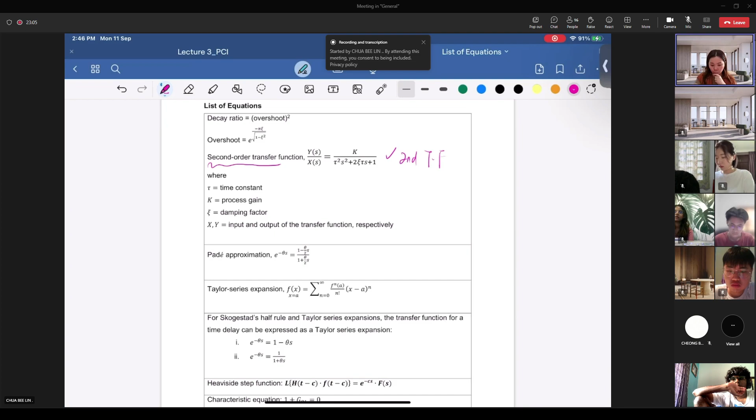So this is the equation. This k is a combination of k1 multiplied with k2. So this is second order. So you can see from here, the first order actually is not given. So the first order transfer function standard equation is not given.

So you have to memorize this, which is a simple one: k over tau s plus 1. So the second order default equation, standard equation for the second order transfer function, is given. So from here, you will be having the second order transfer function formula provided to you.

And this is the damping factor. So something like this, or you prefer to write it like this, it's fine. For the damping factor, you follow the symbol that looks like a curve, ding ding ding like this. So as long as there's a curve, then it is the damping factor symbol. It's up to you how you write it.

Similar to this. So the tau is the time constant that we learned last week. So this is tau. If you have a smaller tau, it means the process is faster. So when tau is smaller, it means it is a faster process.

When tau is bigger, it means the process is sluggish, meaning that when you apply a change to the system, it will take a longer time to achieve the steady state. Then we say tau is bigger.

Then we have the damping factor. This damping factor we will discuss is like a new performance index to check how the process responds to a change. We have some maths involved as well in this lecture 3, and I've included some additional topics. Actually, you have this Heaviside learned in your Maths 2.

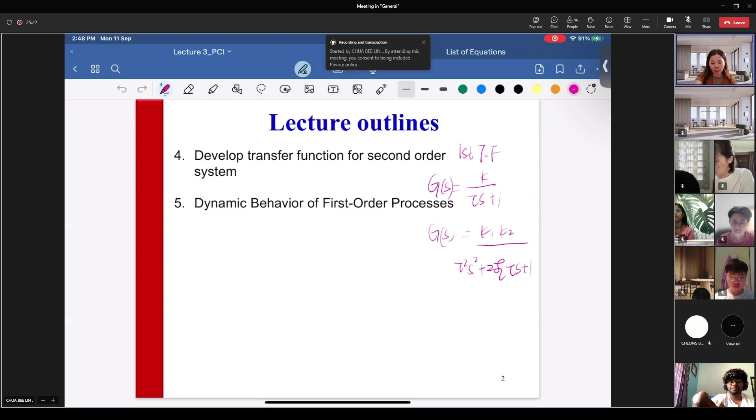So we go back to the outline for today. We will study when you derive the first order, what happens - is it a fast process? You are going to get the response and sketch the graph, for example, to know the dynamic change, or dynamic behavior. Dynamic behavior is your function of the output versus time, the change of your output over time.

We are going to learn the dynamic behavior of the first order, and then next week we are going to learn the dynamic behavior of the second order. But we will derive the second order transfer function first. So this is the lecture outline.

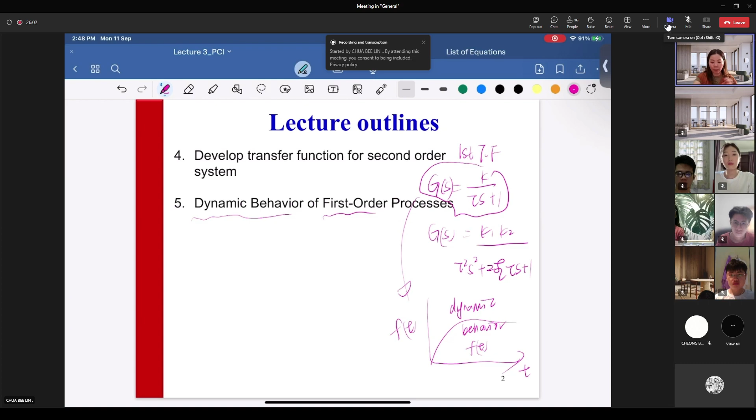Second order dynamic system - for example, how can you get the second order transfer function? For example, with 2 tanks in series.

Like this example, you have 2 tanks in series. Series means side by side. So if the outlet flow rate from each tank is linearly related to the height of the liquid in that tank...

...transfer function - they ask you to derive the transfer function of Q2 over Qi, which is the output of this process with 2 tanks, over the input of this process. So we call this the transfer function of the output over the input, Q2 over Qi, meaning the final output over the inlet, which is Qi.

So you will get Q2 over Qi. Why is it in uppercase? It is because you already Laplace transformed both sides, changing them into the s response. Then you will get the small letter q2.

When you Laplace transform this, like for example like this, you'll be having Q2(s), the Laplace transform. After you perform the Laplace transform, you will get this - meaning this is after Laplace transforming both sides.

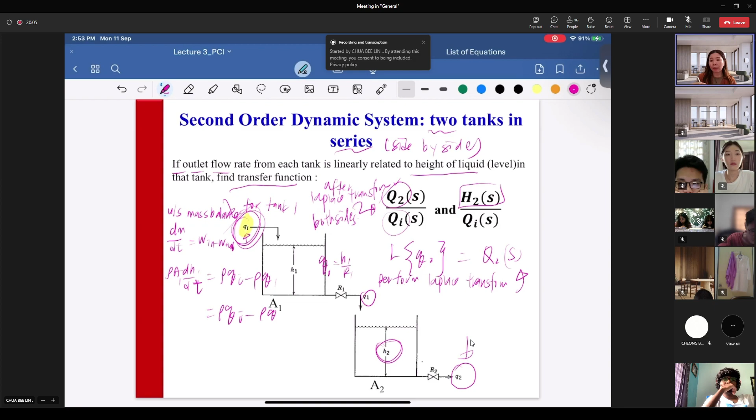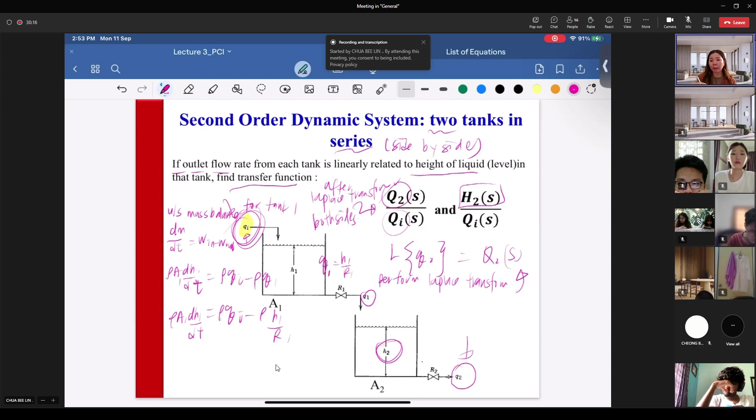So rho H1 over R1, rho A1 dH1 over dt. Then you can cancel the density.

Okay, this will become your first equation of unsteady state mass balance. Then you change this one to steady state mass balance. You'll be having A1 dH1s over dt equals to Qis minus H1s over R1. Then you'll be having equation 2. We actually repeat the same thing like we studied last week. So from here, you'll be having equation 1 minus equation 2.

Okay, so I will go through the example with you. This one is actually starting from dm over dt equals to rho qi minus rho q1. Then straight away they expand this, you put here tank 1 is A1, tank 2 is A2. The cross-sectional area is given, meaning the size of tank 1 and the size of tank 2 are different. That's why you have the A1 and A2.

Okay, so it is the same derivation like the tank level. We have already learned this rho A1 dH1 over dt last week, where we expand rho equals to m per v, m equals to rho multiplied with the volume, and density multiplied with area multiplied with the level. Then for tank 1, we'll be having rho A1 dH1 over dt for the accumulation term. Okay, then they cancel the density. Okay, you will get this equation. So you need to go through again this one, derive again.

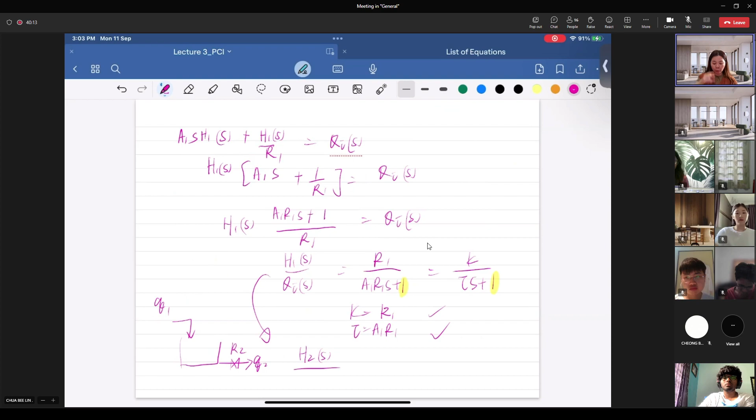Then you repeat the same for tank 2. You will get exactly the same one, like H2S over the inlet for the tank is Q1. So this one will give you Q2 equivalent to H2 over R2, linear relationship. So you don't need to derive again because they follow the same equation, just tank 1 and tank 2 having different inlet. For tank 2, the one going in is Q1, and here is R2 and here is Q2. So follow exactly the same. Your input is Q1, so this will be your input. Your output is H2. Then equivalent to R2 over A2 R2S plus 1.

If you derive the first one for tank 2, you don't need to repeat. You just apply the same, change accordingly. For tank 2, the inlet is Q1, so we change to Q1. And the resistance to flow is R2, level is H2, cross-sectional area is A2. Then you already get your equation number 2.

So just now we have derived, I put it here, you have tank 1 equals to Q, where's the exit flow rate of tank 1? Exit flow rate of tank 1 is Q1. So your Q1 is H1 over R1, and you have derived Q1S equals to H1S over R1. So this is for tank 1, valve 1. For tank 2, valve 2, you will get exactly the same derivation, but this exit flow rate is Q2S equivalent to H2S over R2. So you have this equation.

So altogether you already have 4 equations, the ones I highlight here: 1, 2, 3, and 4. You are going to use what they call this rule, either it is product rule or chain rule that you have learned, so that you can finally derive the equation for the one they ask.

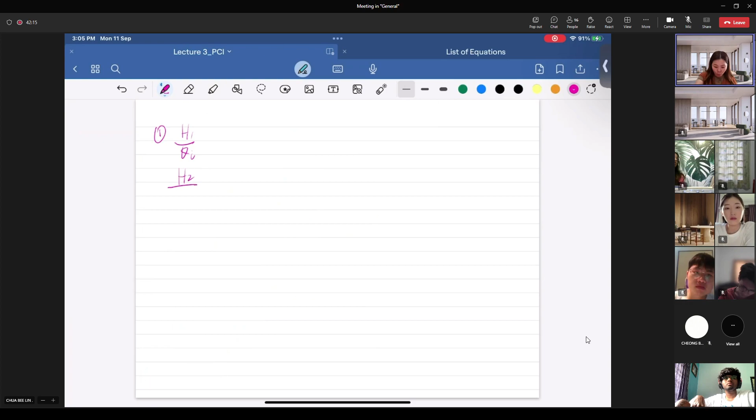For example, they ask for these two, 1 and 2. So you copy all the equations again that you have derived. We summarize the equations: number 1, you have derived H1 over Qi. You have derived H2 over Q1 as well. You have derived Q1 over H1. For example, your valve, right?

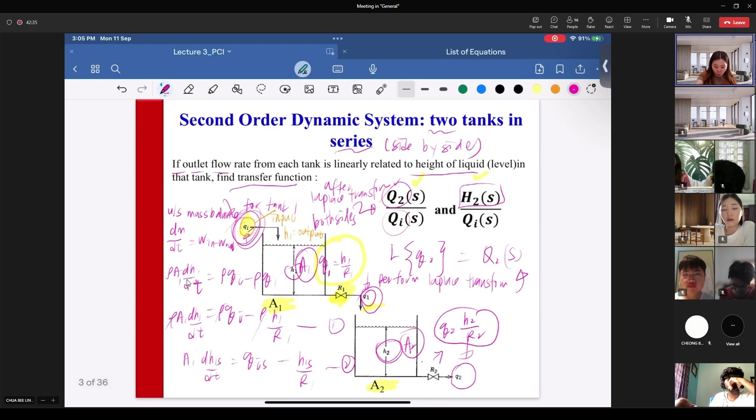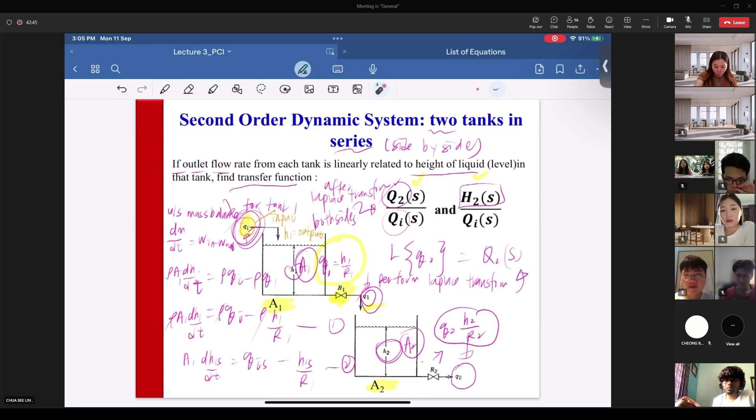You have Q1, so valve number 1 - if you look at the figure over here, this is valve number 1. Where's my pen? Okay, I use this. So this is valve number 1. You have derived the equation to be Q1 equals to H1 over R1. So you will be having the equation of Q1 over H1, and also you'll be having these 4 equations.

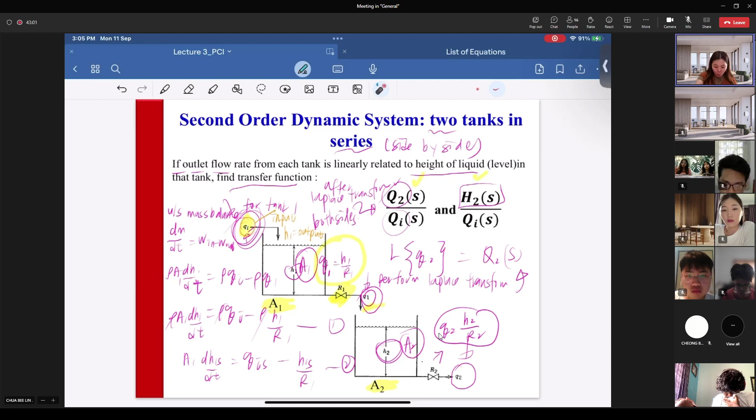You rearrange, you copy the 4 equations you have derived. Then you'll be having also Q2 over H2. So these are the 4 equations I have.

Okay, for the valve, H2 over Q2, or Q2 over H2. This one is just maths. Why do you need to rearrange the position? Because later you have to know we are using the product rule or chain rule, something like that. You have learned this in maths already. For example, okay, see,

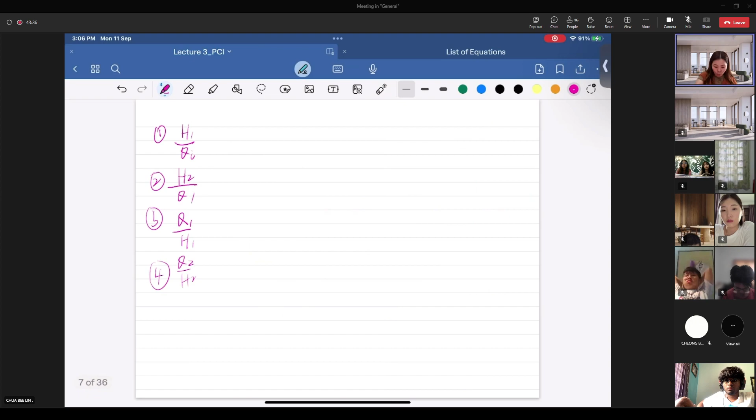they ask you to derive this Q2 over Qi. You have to utilize all these four to finally get this. So what we do is we will focus on the one on the top. You'll be having this, correct? So you will be having Q2 over H2 multiplied with this one on the top.

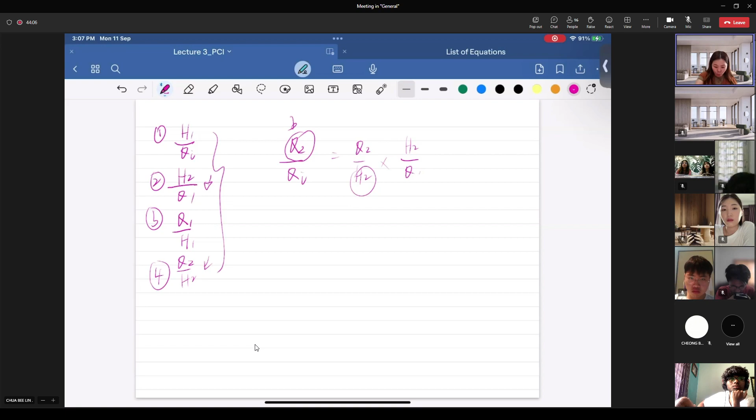So you will find something, what is H2. Your H2 is only this, so H2 over Q1. Then you'll be having this one on the top, Q1 over H1. And finally, H1 over the Qi. Okay, so that you can cancel, and finally get this one over this one.

This is you have learned in maths, I don't know which maths. So when you have this Q2 over the Qi, then you will start from top, Q2. You find which one relates to Q2, like for example we derive the equation, the one I highlight in yellow, right? So you have to find what is the Q2 equation involving Q2. Only this one. So when I only have this equation, like the one I put in yellow color, 1, 2,

you cannot see what point. So this one, 1, 2, 3, 4, right? You have to find something that has Q2. So only this equation has Q2, man. But you have to rearrange so that the Q2 will be on the top. So you'll be having Q2 over H2, right? You cannot rearrange Q2 multiply with R2, ma. Therefore, you will only get this one, ma.

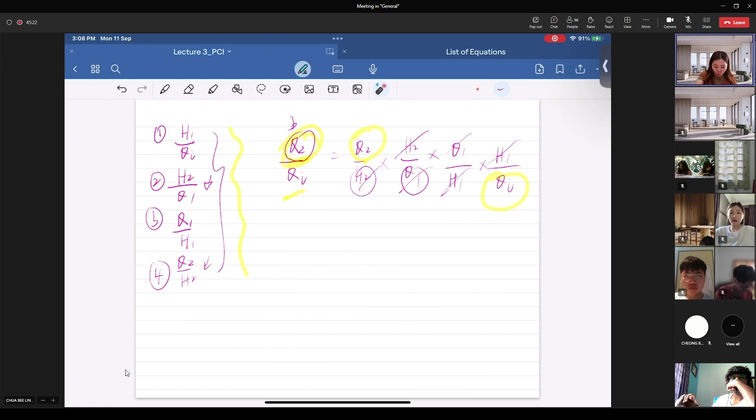Q2 over H2, you have derived first, then you link to the chain rule to actually finally derive the Q2 over Qi. So how do we start? We will start with the one on the top, okay? This one you can memorize also, fine. You use your maths. This is the question: they ask you to derive Q2 over Qi. So you start with Q2 and put the Q2 on the top.

Then I will go to this slide. Okay, I have this Q2. My Q2 must be on the top, means I must rearrange the equation to become Q2 over H2. Must be a transfer function, ma. So Q2 over H2 equals to 1 over R2. Then I will put it here, my equation. Then my H2 is at the bottom already, ma. So I must multiply with H2 on the top so that I can cancel out later.

So H2, you go to find which one has H2 in the equation. So H2 over Q1, that's this one. Okay, then you find Q1 must be on the top. Then this one, Q1 over H1. Then you can cancel the Q1. Then H1 must be on the top again. Finally, it's H1 over Qi. So something like that, you can cancel to finally get Q2 over Qi.

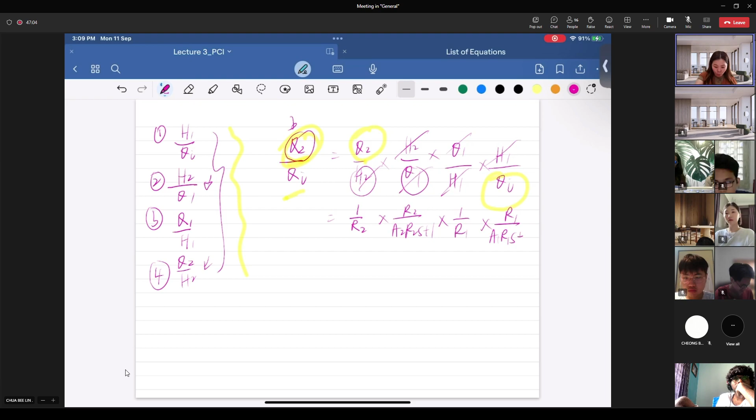Product rule or chain rule, something like that. Then you put all the equations there. You have derived this. The equation for the first one is 1 over R2 multiplied with R2 over A2 R2S plus 1, multiplied with 1 over R1 multiplied with R1 over A1 R1S plus 1. Okay, so you cancel. Finally, we'll get 1 over A.

We'll put all the information for tank 1 first and then tank 2. That's why this one will be placed at the front. So A1 R1S plus 1, then A2 R2S plus 1. Okay, so this is exactly like the pattern of K1 tau S plus 1 multiplied with K2 tau S plus 1. So 1, 2 to get this.

Like your tau 1 is A1 R1, then your tau 2 is A2 R2. Your K1 is 1, your K2 also 1. You split into 2, okay, so this one will be your second order. So when you have this, it is like the maths. You have tau 1 S plus 1 multiplied with tau 2 S plus 1. When you do the expansion, you'll be having tau 1 tau 2 S squared plus 2 damping factor tau S.

So this one is actually, before you compare with the standard equation, you'll be having tau 1 plus tau 2. You do the expansion, S plus 1. So this is the one we highlight, this one. When you do the expansion, but I do not use the A1, R1, I represent tau 1, tau 2. So tau 1 is A1, R1, tau 2 is A2, R2.

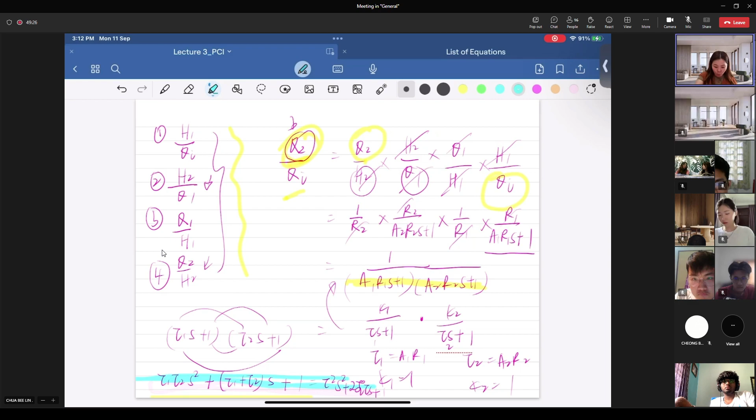So from here, this equation, you will compare with the default equation, which is tau square S square plus 2 damping factor tau S plus 1. So this is the standard equation for second order. Okay, cannot see this one. Okay, so from here, you have derived the second order transfer function for this one. Okay, so the answer, they derived for you already at this slide. Okay, so finally, you'll be having your tau 1 is A1, R1, and then your tau 2 is A2, R2.

Okay, then you can derive your equation H2 over Q1, and then they want the Q2 over H2 as well. So from here, what else do they want you to derive?

So you can play around with the chain rule and derive the rest. Okay, so then we go to the next example.

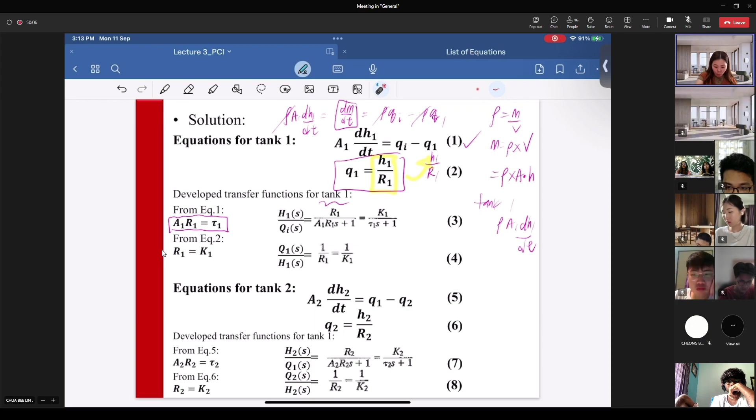So if you want to derive the transfer function to represent the first block, it will be H1(S) over Qi equivalent to K1 over tau1*S plus 1. Let's say this is the second example. And for this block, it will be Q1 over H1 equivalent to the transfer function 1 over K1.

And for this block, H2 over Q1(S) is equivalent to K2 over tau2*S plus 1. And the last one, Q2 over H2 is equivalent to 1 over K2, for example.

So from this case, if you want to have Q2 over the Qi, it is just a multiplication of the first transfer function, multiplied with the second, multiplied with the third, multiplied with the fourth to get the answer. So it will be H1 over Qi, multiplied with Q1 over H1, multiplied with H2 over Q1, multiplied with Q2 over H2, to finally get the answer of output Q2 over Qi. So this is how we get the transfer function of the final output over the initial input Qi.

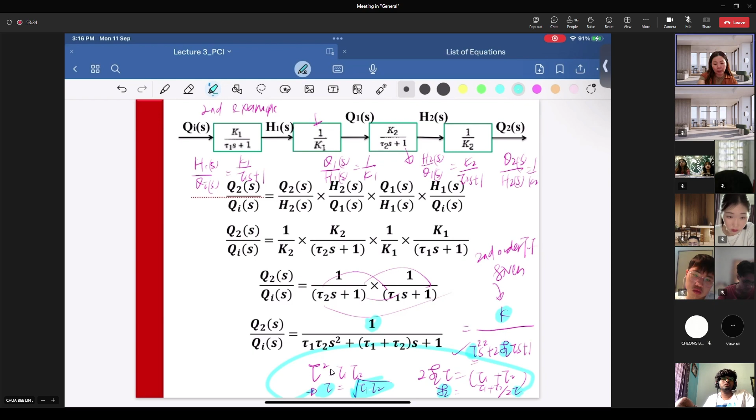So your K by comparison is 1. Then your tau you can get from the square root of this. And then your damping factor you can get from here. So by comparing the derived transfer function of the second order to its default equation, you solve three things: K, tau, and also damping factor. So this is when we talk about the second order transfer function, you have to calculate the K, the tau, and also the damping factor.

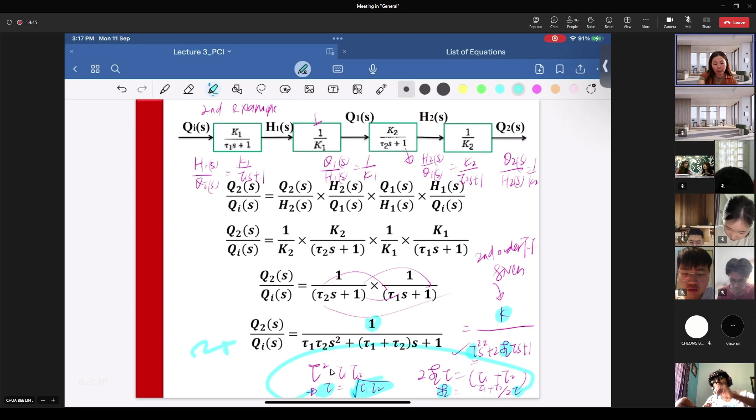For example, you do the expansion already, so you can compare just like this slide. You compare with its standard equation, this one. Then you're able to solve all this. The solution is given as well in this slide. Okay, so just now...

This one you already solved tau, where you solve your tau based on here. So you just substitute in. This is your tau. It's the same solution like I have presented just now.

Okay, so this is the introduction, how we derive the second order transfer function. So how can you get the second order transfer function? It's when you have 2 tanks. If you only have 1 tank, then you will get the first order. If you have 2 tanks, then you will get second order. Okay, so next.

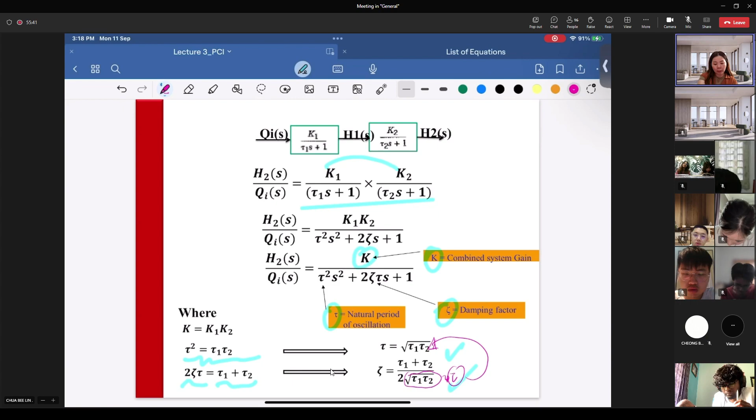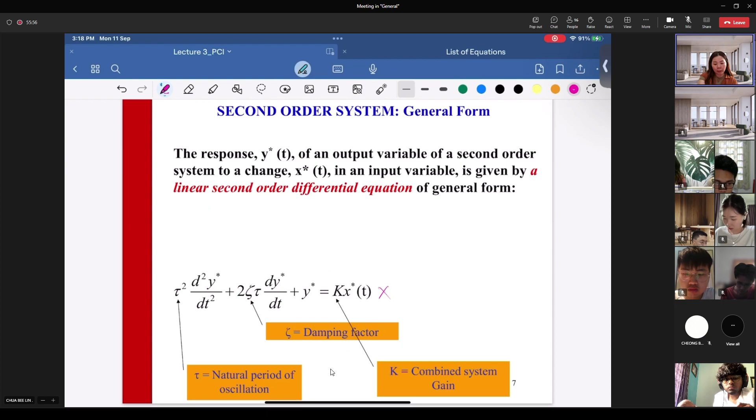So for the second order system, we already have the standard equation given, so this one you don't need to memorize. For second order, you just need to memorize the S response: K over tau square S square plus 2 times the damping factor times tau S plus 1.

The T response, you don't need to memorize. Just like the first order, the T response or the ODE equation, we don't need to memorize. You just need to memorize the transfer function for the first order and the transfer function for the second order, which is given in the list of equations.

They just explain to you: this is tau, this is the damping factor, Y is your output, and X is your input, exactly the same as the first order ODE equation. So this is the T response.

What you need to know is just the transfer function for the second order. This one you need to apply, and it is given in the list of equations. The one you need to memorize is only the first order transfer function, which is K over tau S plus 1.

So for the second order system, you don't need to know this T response. We already covered this S response.

So now you have transfer function block number 1, let's say represented as G1. The second transfer function is G2. If you want to get Y2 over U1, which is output over input, it will be a multiplication of these two blocks, meaning G1 multiplied with G2.

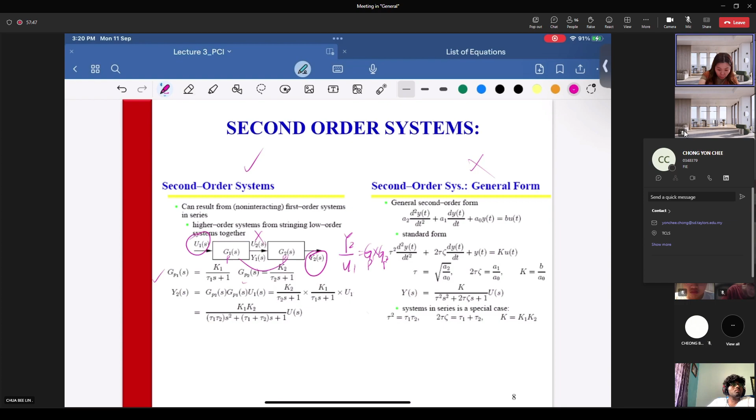Then if G1 is given and G2 is given, let's call them GP1 and GP2. Your GP1 is K1 over tau1 S plus 1, and your GP2 is K2 over tau2 S plus 1.

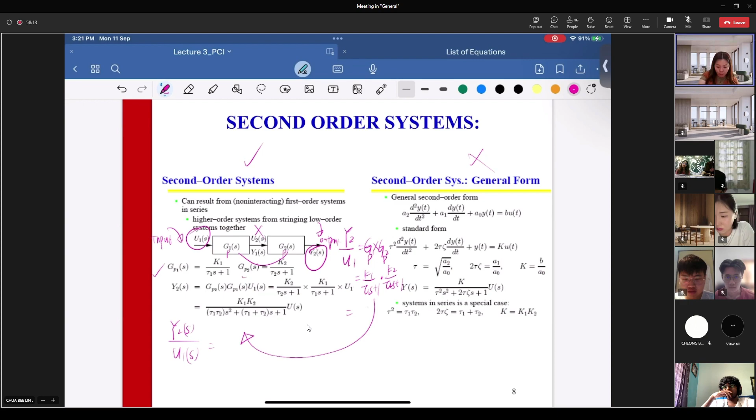Then you do the expansion, and you will get this equation and compare. You rearrange to get the output, which is this, and the input, which is U1 S. Do the expansion and you will get exactly this equation.

Move this U... 1 is missing here, so move that to the left hand side to get this. Then you will get K1 K2 over tau1 tau2 S square plus—this one is wrong a bit—tau1 plus tau2 S plus 1, compared with your K over tau square S square plus 2 times the damping factor times tau S plus 1.

And finally you will solve the answer to get tau. This equals this, equals this, and this equals this by comparison, so this will be the answer.

So you compare this one with this: this whole thing equals 2 times the damping factor times tau, and your K1 K2 is like your K. Then you will get this answer.

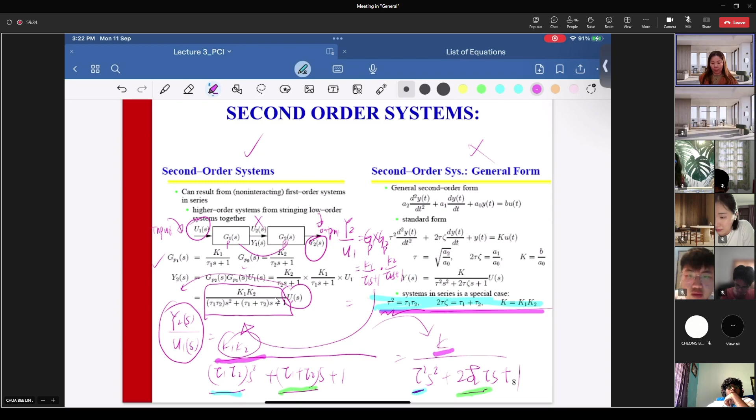Okay, so this is the introduction for the second order transfer function. Okay, the general form for the T response unit—we will skip the T response, the equation. Okay, now

you link to the second week, where we derived the first order transfer function. So the first order transfer function general equation is K over tau S plus 1. Okay, so this is the output over the input.

For example, they use the equation where input is U. Output, I don't know what symbol they use, let's say... okay never mind. So this is actually output over input. For input, sometimes they use X, sometimes they use U. So this is the input transfer function.

From here, there are different types of input that you can apply to this system. For example, you increase the input from one value to a second, different value, and it remains at the new value forever, meaning there is a value change.

One, you have to wait for the process to become steady state first, then you apply a change to the input. The change—there are many types. We only learn the popular types of change that you can apply to the system.

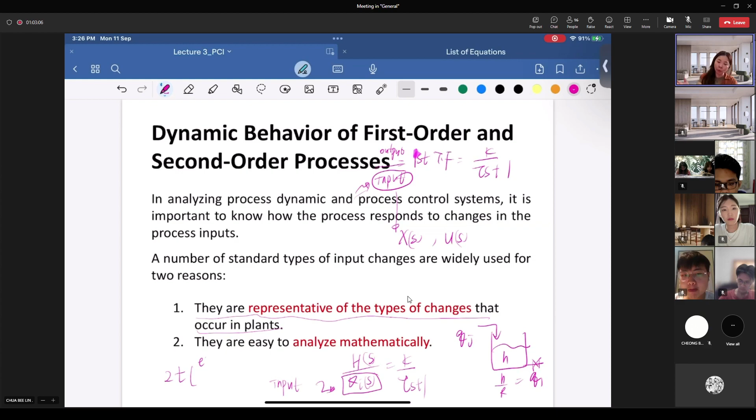So every 1 minute, 2 units. If plus, then it is an increase. If minus, then it is a decrease. So this change follows a slope like 2t, meaning every 1 minute increase by 2 units, another minute increase by 2 units. So this is like 2t.

When you change to the t response, your QI follows the pattern QI equals 2T. Small letter means time response, uppercase means already Laplace transformed, QIS. So in t response, it follows the pattern of 2T.

For example, this one is ramp input. We will cover a few popular types. They are representative of the types of changes that occur in the plants. So the first one is step input. Just now was the introduction. It is like you have the equation of this one.

You apply a change to your input, which is QI. You can use this example to link back. So this is the process: the output is H, the input is QI. Now, what are the changes you can apply to QI?

The first one, you change the QI using the step input, meaning QI initially at steady state may be a value of 50 liter per minute, for example. Then once it has achieved steady state, you go and change this QI to 70. So for example, 50 to 70, using liter per minute as the unit for my QI.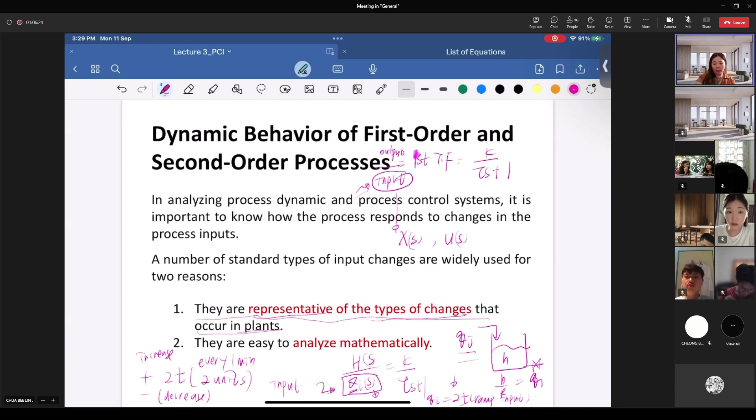Let's say I use the input QI, in the same example I provided just now, a tank level. My input to the tank is actually the QI. So I apply a change, meaning my QI is initially already at steady state at 50, then I change this QI to 70. So when you Laplace transform, it is actually transforming a constant number, 20 over the s. So m over the s when you have a step change.

So in technical terms, step change is when you change the input by a magnitude of m. When you Laplace transform a magnitude of m, you get m over the s. Okay, so this is the example.

The second example: the heat input to the stirred tank heating system is suddenly changed from 8,000 to 10,000. So this is a magnitude of m. You use 10,000 minus 8,000, you get 2,000. When you Laplace transform 2,000, you get the answer of 2,000 over the s. When the change is a number, from one number to another number, Laplace transforming that number will give you m over the s.

Just like you have learned in maths, when you Laplace transform a constant, a number, the solution for this conversion will be that number, the change, over the s. Okay, so this is the one we call the step input. So when people tell you step input, it is actually a change from one number to another number and remains constant. So when you Laplace a number, you get that number over the s, the number being m, the magnitude, over the s. So this is the step change.

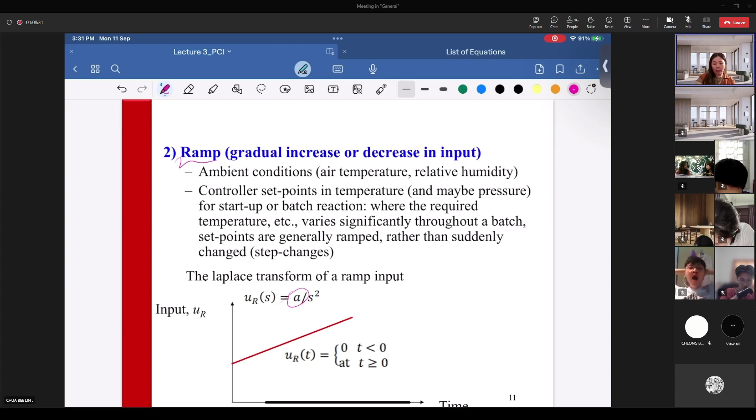So if we want to put the response, let's say I use my same example. This is my qi, this is my h, and I derive my transfer function h(s) over qi(s). My qi will have two forms, one in time response, one in s response. In time response, every 1 unit of time, it can be 1 minute, 1 second, 1 hour, let's say I use 1 minute, it changes by, for example, A units. So T response will be small q, qi as a function of t equals at. When you Laplace transform this, you get qi(s) equals a over s squared.

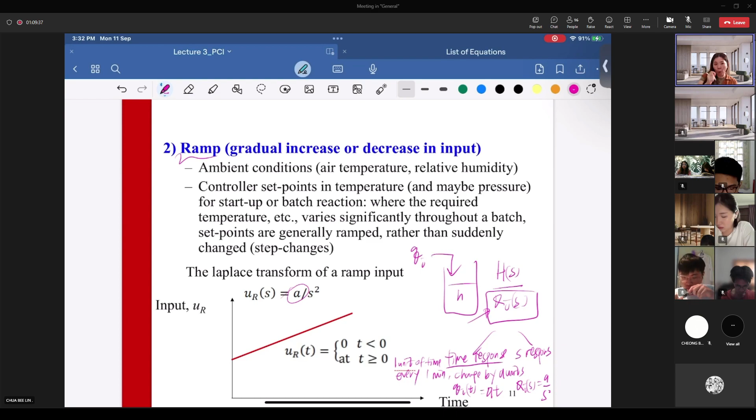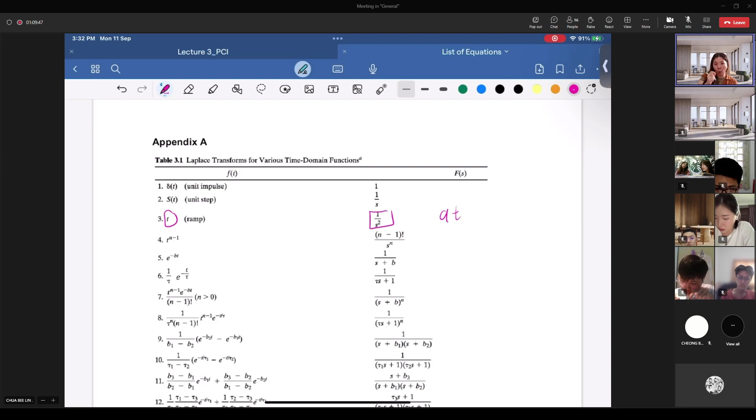You don't need to memorize this, it is in the list of Laplace transforms. When you have t, the Laplace transform is 1 over s squared. If you have at, when you Laplace transform this, you get a over s squared. So this is the one they call the ramp, or you can put the general form as at, so this is like a function of t.

Now using the same example, your qi is the one you have, so it is actually qi equals at, then you have qi(s) equals a over s squared. When you Laplace this, you will get this. I don't put too many things there so you can relate better. So this is Laplace - when you Laplace transform and change it, this will give you this.

So what is ramp input? Ramp input is you have T response, you have S response. T response is AT, S response is A over S squared. So AT means every 1 unit of time, you change by unit A.

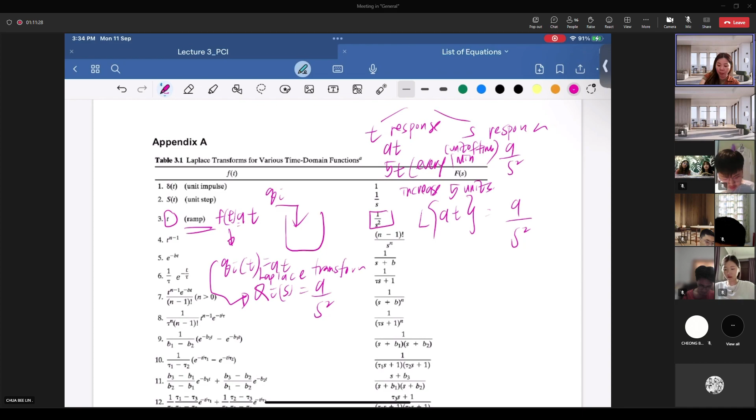Let's say every 1 minute you change by 5 - like after 1 minute, I increase 5 units more. So it will be represented using the equation 5t. We can put it as 5t, meaning every 1 minute or unit of time, it can be minute, second, or hour, increase 5 units. So this is AT, the ramp input.

So what is ramp input? Ramp input in T and in S. In T, it is AT. In S response, it is A over S squared. So this is ramp input.

So to understand better, you put some notes there. For example, every 1 minute the change is 5 units, then I will have this one, 5t, and this one will be 5 over S squared. Just like you are the operator - every 1 minute you increase 5 units. If this is temperature, now it's 20 degrees Celsius, you change to 25, after 1 minute it becomes 30, after 1 minute it becomes 35. Change of 5, increase - it can be negative, meaning decrease.

Starting from 30, drop to 25, drop to 20, 15. So this is actually the ramp input AT because it follows a constant pattern - every 1 minute you change the same value. So this is ramp input, it follows the slope. You just have to understand this and put some notes there. Then you will know when people tell you about the ramp input, it is every same unit of time, 1 minute, you change the same value, same units.

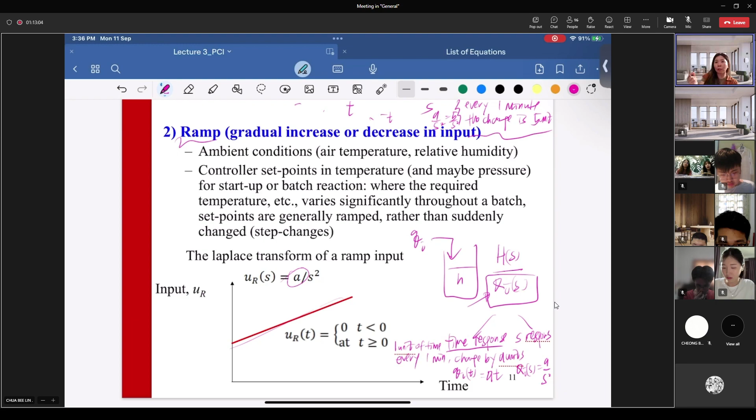5t - every 1 minute, change 5 units. After 1 minute, increase another 5 units. So this is 5t. When you Laplace transform 5t, it will give you 5 over S squared. So this is the one we call the ramp input.

Ramp input - that third one is the hardest part, which is the rectangular pulse. We will go through exactly the solution, how you finally get this one. It is a long calculation, I will explain further during the tutorial section. It is a long calculation, but you have learned this in your maths too, using the equation of h(t minus c), and then f(t minus c), the Laplace of this you will get e to the minus cs dot f(s). We will solve this one again using some scenario application so that you will know how to link the Heaviside - Heaviside means the change is by a number.

Just like now is 5, I go to change to 7. Okay, after 3 minutes, I go to change the 7 back to 4. So it follows the number, a number changes to a new number and then changes to another number.

So if, let's say, it is a rectangular pulse, initially, for example, it is 10, you go to change to 15, then you go change back to its original value. So the change is like a box. Originally 10, go to increase by 5 units, then go back to its original value. So this is like a rectangular, so we call it the rectangular pulse. Initial value, after the changes, final value is exactly the same as the initial value. So this is the rectangular pulse.

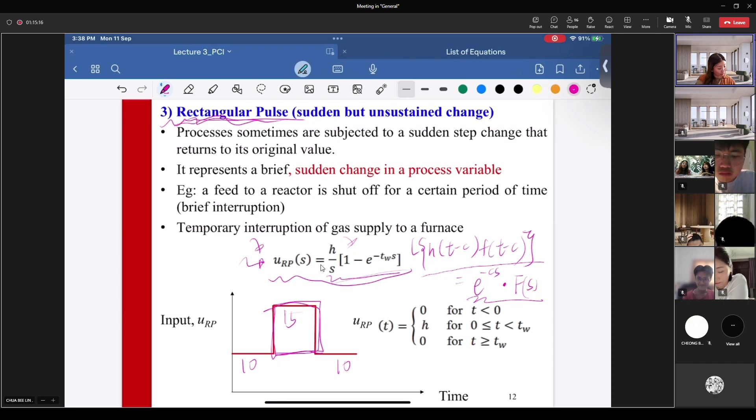So the solution is not given over here. What you need to prepare for tutorial 3, go do your revision. Refer to the additional notes for Heaviside already posted to MS Teams. During tutorial 3, I will just go through the solution because I'm not teaching Heaviside again. That's why the prerequisite materials are already posted. Please do your revision before you come to the tutorial section. If not, you will feel very blank, very fast.

So do your revision to prepare yourself better so that you actually know how to solve the Heaviside. Heaviside means when you Laplace transform, you get function of s. When you reverse Laplace transform, you get the function of t. If you can still recall what you have learned in Heaviside, the idea is the solution of the Laplace transform is either 1 or 0. If it is 1, it is on; when it is 0, it is off. We will cover this in our tutorial later in more detail.

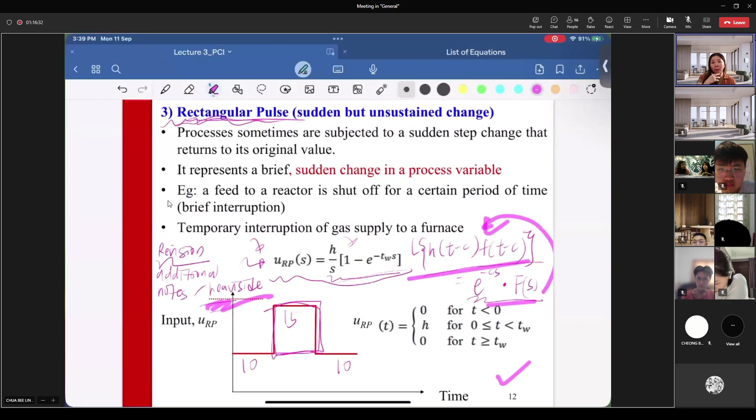Okay, so now next, after the class I will show you one example. So let me finish all the changes first. Impulse input is when it is very quick and the value is 1. It represents a very short and transient disturbance, just like you go to change the value to a new value, and it is wrong already, I faster change back to its original value. Maybe it is within 1 second. It is very fast, very short, and then it goes back to its original value.

So it's just a very small disturbance. The change, maybe it is 1, then it is 1. If, let's say, the change is 5, then it is 5. So it follows exactly the same value. When you Laplace transform, you won't get any 1 over the s or 5 over the s. So this is the impulse input, it means the change is very, very quick and short. Then the impulse is 1. If, let's say, you change by 5, then the answer is 5, for example.

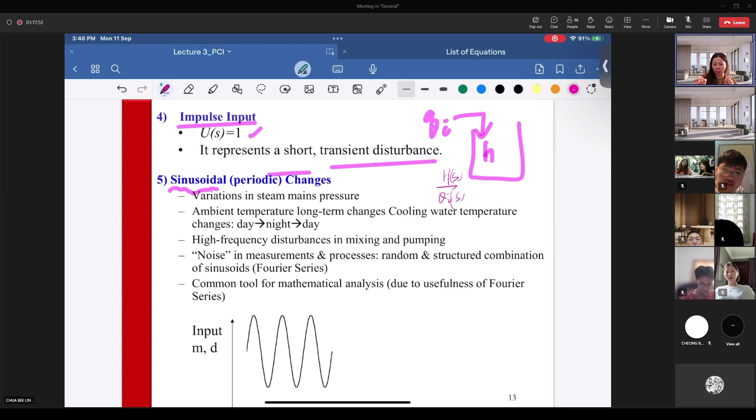And then you have the sine wave. For example, now this is H, and this is the QI going in. When you Laplace transform, you get HS over QIS. Follow the same solution: unsteady state mass balance minus the steady state balance, introduce the deviation variable, Laplace transform both sides, rearrange output over input. Similar steps, you get this output H over input QI.

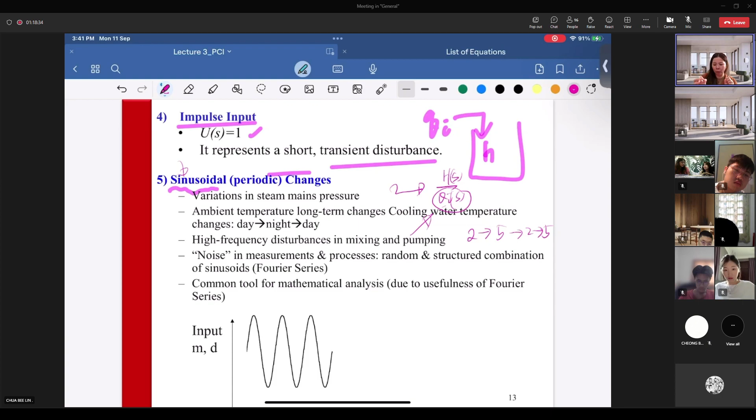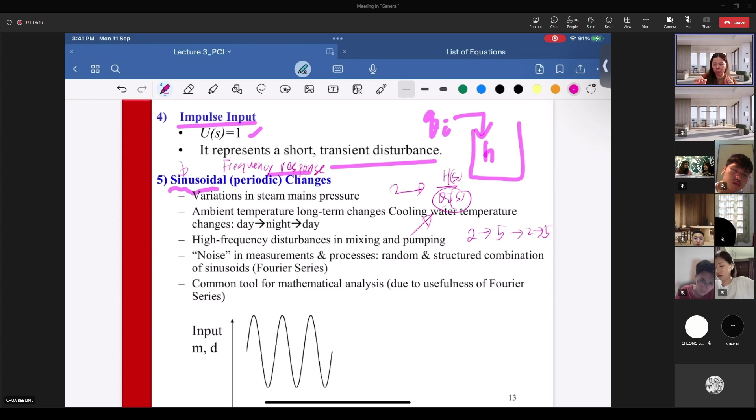So now the change in your QI follows a pattern, for example, from initial value 2, change to 5, go back to 2, change to 5 again. It's like up and down, up and down, up and down. The change applied to this QI is up and down, following a sine wave. We'll cover this not so soon, you'll be learning this when you cover the topic of frequency response, when you want to derive the equation to represent your controller. So not so soon, but one of the inputs is a sine wave applied to the Q, like the pattern of up and down. So these are the 5 popular changes of the input that always occur in the plant.

Okay, now disturbance type is also the same. You remember when we have this, let's say you have an actuator to control your QI, meaning your QI will be classified as a manipulated variable because of this control valve. Let's say I have my Q2 here.

My Q2 is just a flow into the system. If anything goes wrong for this Q2, I cannot do anything by adjusting, because I do not have a valve to adjust the Q2. Then my Q2 will finally affect my H. Actually, both Q1 and Q2 will affect my tank level, but Q2, I do not have any control valve. Therefore, my Q2 will be classified as disturbance variable.

My H here will be my control variable. Manipulated variable is anything you adjust to reach the desired value for H. You go and change your QI. For example, the tank level is too high, you go and reduce the QI by adjusting the valve. But you cannot change Q2 because Q2 does not have any valve. It's a stream going in, so your Q2 is the disturbance.

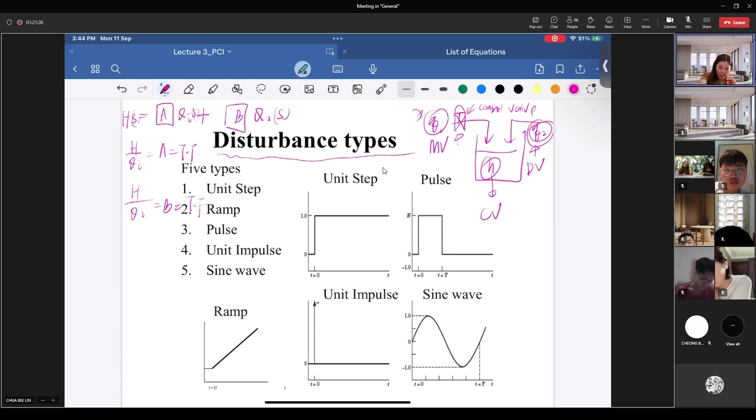So if you have 2 transfer functions, how you identify which one is the manipulated variable is by identifying which one has a control valve. If it has the control valve, then it is the manipulated variable. The other input which does not have a control valve will be classified as disturbance. So in this example, my Q2 is the disturbance, because it has no control valve. Anything going wrong with H, you can adjust QI, but not Q2, since Q2 has no valve. So it is classified as the disturbance variable.

So if a change is applied to Q2, it is of the disturbance types. It is exactly the same as the 5 types we have learned: it can be unit, ramp, pulse, unit impulse. This pulse is like the rectangular one, which means this one. We will learn more during tutorial - you have to solve it using Heaviside.

You will need to prepare before you come to the Wednesday tutorial 3. Please go through the Heaviside materials - you can refer to my notes. So this is the disturbance.

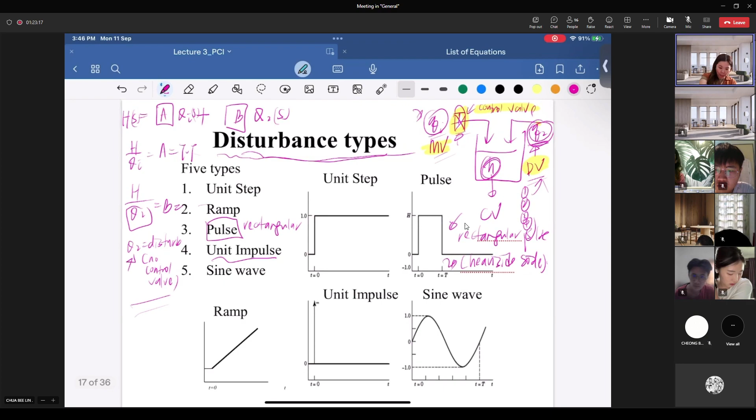I have linked the example. Let's say your output is H. This output is affected by 2 inputs: one is QI, the other is Q2. You identify the one having the control valve, then you classify QI as your manipulated variable and Q2 as the disturbance variable. Then you have 5 different types of changes you can apply to this. So this is just something similar to the changes you can apply to your manipulated variable.

Now once you have your transfer function, first order transfer function, you have K over tau S plus 1. And let's say your input is generally represented using X, your output is generally represented using Y. So let's say I have the same example just now: I have QI and this is my H. My output is H, my input will be QI in S response. So now generally I use Y to represent my output and X to represent my input.

So let's say you have your first order transfer function as this. You already know your input has 5 types of changes you can apply: step input, unit step input, ramp, impulse, pulse. We cover the first one. Let's say your input has a magnitude of M - this is what we call the step input, and the change is by magnitude of M. So if you use this example, your QI is initially at 50, already at steady state. Now I change this 50 to a new value 70, and it remains at 70. So the change is 70 minus 50, M is 20. So let's say during steady state, my QI is 50 liters per minute.

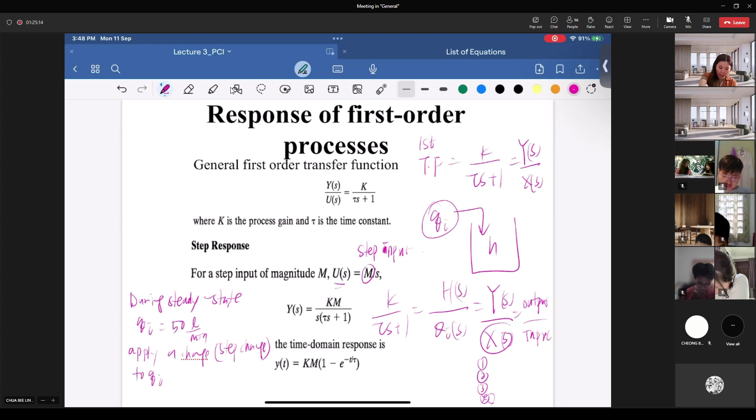Apply a change, which we call a step change, to QI. QI now becomes 70 liter per minute, as a function of T. When you Laplace transform, you get QIS equivalent to 70 minus 50 over S, so 20 over S. This is the scenario.

When you put this in, generally input is X, so XS is M over S. Your input, X, in this example is QI, as a function of S. So this is the input. When you have XT, the change is by M, meaning unsteady state minus steady state value. For example, 70 minus 50. So this gives you the answer of 20 over S.

So when you have YS, let's say here they don't use X, they use this as an input. Refer to the question, it can be any alphabet they prefer to use. Sometimes they use R, sometimes U, sometimes X. These are the popular alphabets used to represent the input. They will tell you they represent the input using the alphabet U.

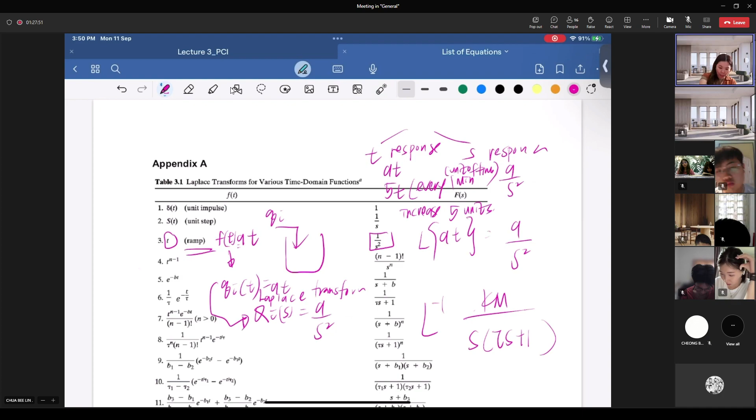Similar, right? Let me check. You will get K, then M, still got one S multiplied with tau S plus 1. So Km over S tau S plus 1. Inverse Laplace of this, so you have to find something S multiplied with. So you will get this: Km, S, tau S plus 1.

Inverse Laplace of this, you will get K is the constant, so don't touch. M also a constant, a number, don't touch. Then you'll be having 1 minus e to the negative T over tau. So this is the direct conversion using the term.

It's the same answer given in the slide: Km, bracket, 1 minus e negative T over tau, using a direct conversion of this. So this originally is output over input, K over tau S plus 1.

Now your input is actually a step input, where US equals M over S. So this gives you YS equals Km over S bracket tau S plus 1, because you just multiply this to the other side. By checking the closest term, similar pattern, you identify term 13 to do the inverse Laplace transform and get back the answer in the form of T response.

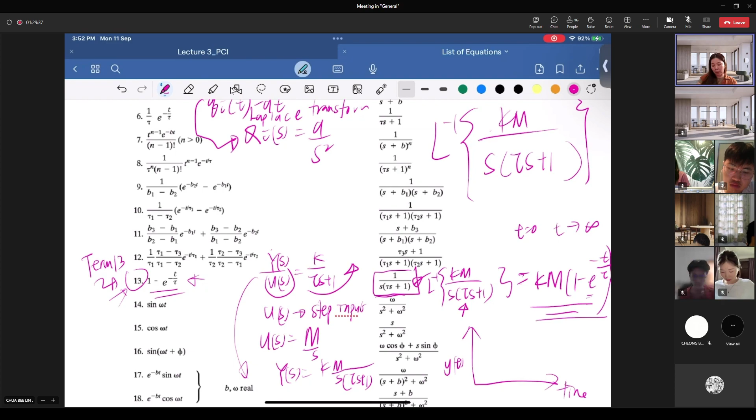So when you get the T response and plot the graph, you get your output YT over time. For the exponential term, you just substitute T equals 0 and T goes to infinity, then you can further plot the graph to get the dynamic behavior. This is the example when the change of input is a step input. So this is the answer you got by referring to term 13.

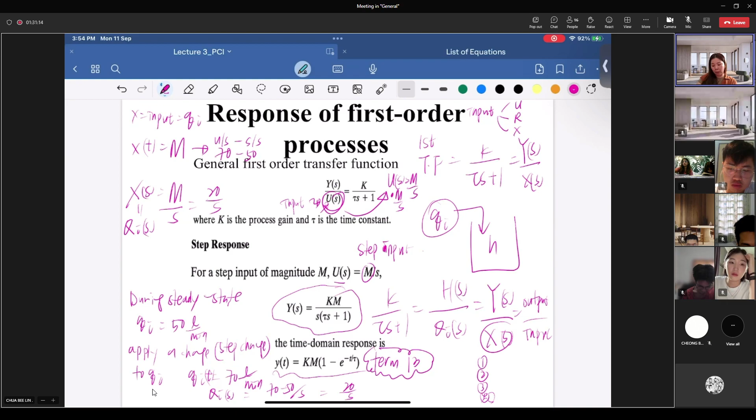Okay, so you already have your y here. When the time equals to 0, you can put it here. So what is your y at time equals to 0? And what is your y infinity? So y at time equals to 0, you can sub it here.

You will have y0 equals km, 1 minus e negative t0 over tau. This will give you 1. So 1 minus 1 will give you 0. You will get y0, and so it's 0.

You sub the t. When you sub t goes to infinity, this part will give you the answer equals to 0. Then for y infinity, you will get km, 1 minus e to the negative infinity. You will have km, because this part gives you 0. Therefore, you get y infinity is km.

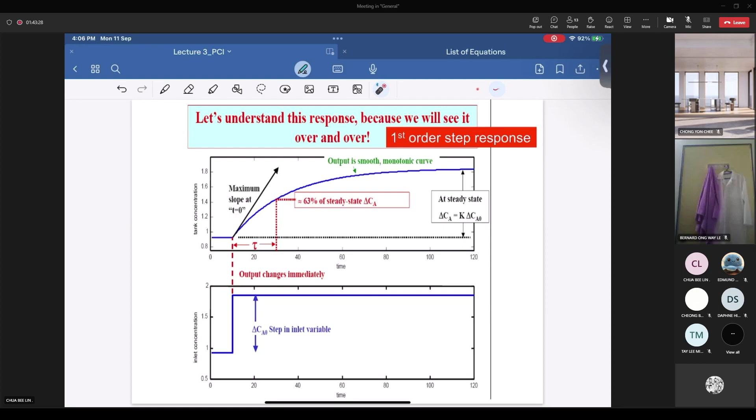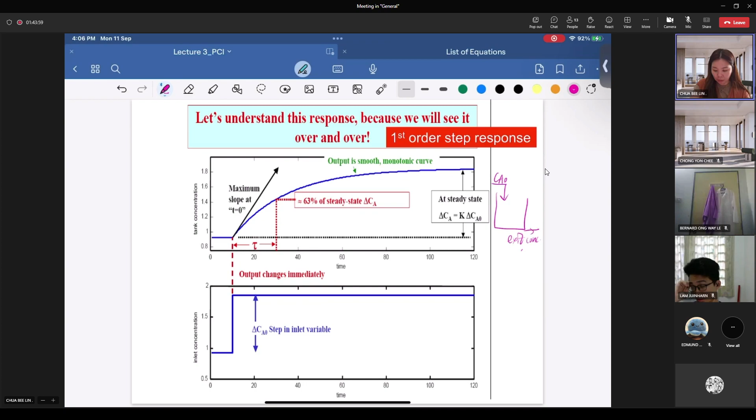Okay, I'm back. So let's say we use a different example. You have a tank. Now the inlet for this, let's say the inlet entering concentration is Ca naught. The inlet stream concentration is Ca naught, and this contributed to the exit concentration. So your exit concentration is, let's say, Ca. This is actually using the equation of concentration multiplied with the volumetric flow rate to get dm over dt. You have derived this in the previous example. We use the concentration multiplied with volumetric flow rate.

So now they want you to study the dynamic behavior of your output, which is Ca, over time. So let's say you have the equation, you start from dm over dt. You can refer to the previous examples in previous lectures. You use the mass balance, and finally you get your Ca over Ca naught as your transfer function. So this is the transfer function of output over input.

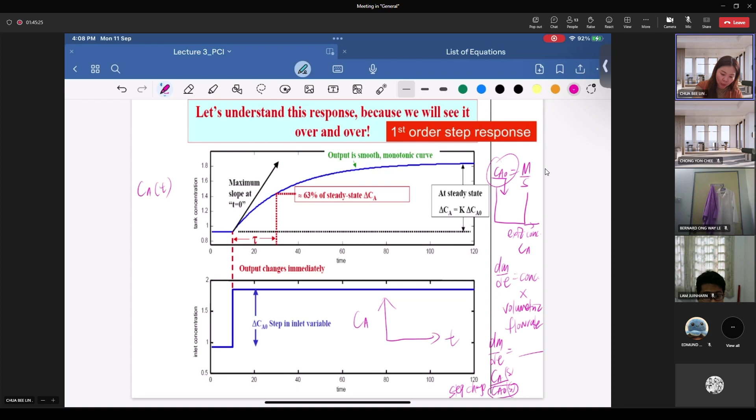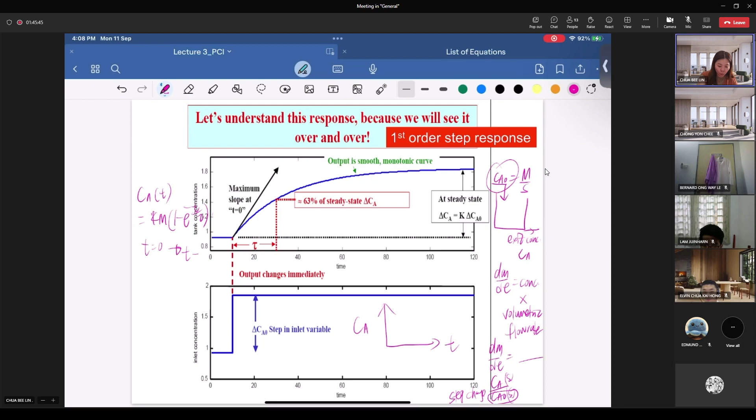So now a change is applied to your input, let's say this is a step change. It must be a step change. So let's say this is the question we have: we have a step change applied to the inlet, which is the input. In this example, the input is Ca naught. So for the step change, once you Laplace transform, you have m over s. So in this case, you get Ca as a function of t equivalent to the equation just now: Km(1 minus e to the negative t over tau). Then you substitute t equals 0 until a few values of t, until t goes to infinity, and you're able to get the blue curve showing the change of Ca over time for the step input, first order transfer function.

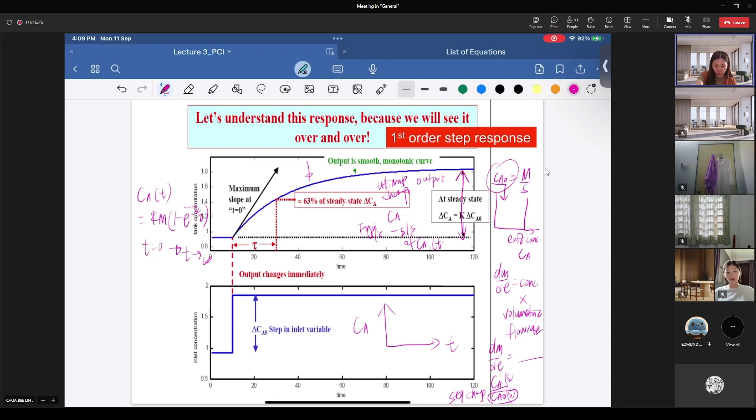Okay, now how do you find the tau? Let's repeat this a second time. Tau is related to the change of the output. So the change of the output we call the ultimate change. In this case, the change of output is Ca. Initial value, using the unsteady state value, minus the steady state value of Ca during time equals 0. So the total change of Ca, total change.

If you plot it, it will be from the initial value until the final value. So this range is the ultimate change of the output, which is the ultimate change of the exit concentration, this one. So the initial value of Ca, when a change is applied to the input Ca naught, you wait for a while and collect the data until Ca achieves another steady state due to the change you applied to Ca naught. So the change from the beginning steady state until the end point steady state, the total change of this we call the ultimate change of Ca.

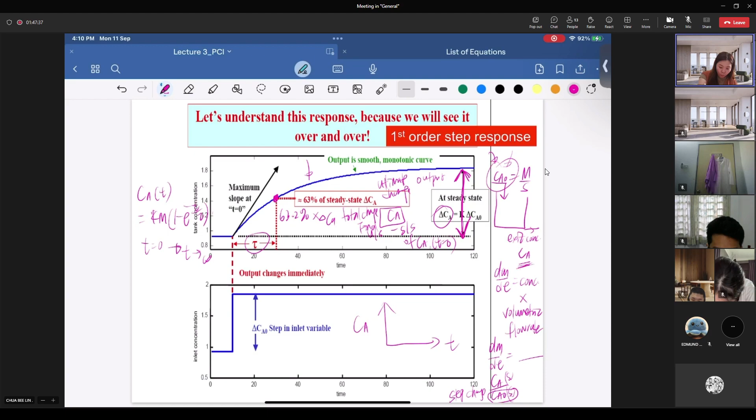So 63.2% of this total change is where you actually solve for tau. Let's say this total change is delta, the change of Ca. So 63.2% is where you can find your tau, where this point is actually 63.2% multiplied with the total change of output. So if you have this example, like the tank example, this is your input Ca naught and the exit concentration is Ca. You apply a change to this Ca naught. Initially, for example, the unit for concentration can be gram per ml, mass over volume, gram per ml.

Let's say it is 5 gram per ml. You go to increase the concentration to 7 gram per ml. So it is 5 gram per ml, change to 7 gram per ml for your Ca naught.

Then you stand there, perform the laboratory works to collect the data of the Ca. When you increase the inlet Ca0 to a new value, this concentration follows your mass balance, it will actually be affected by this Ca0. So you go to collect the Ca from initial T equals to 0, take a few intervals, then you slowly plot all the Ca until finally your Ca already achieves steady state. Perform laboratory works to collect the data of the change of this Ca.

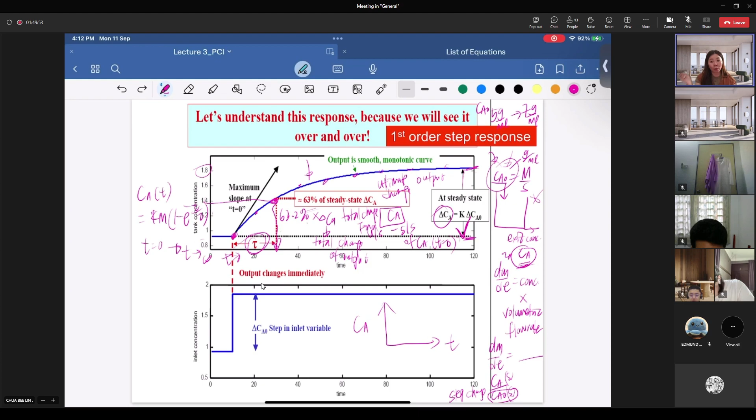So another example is thermometer. We have learned thermometer dynamics as well. We have the Y output to represent the thermometer reading and the surrounding temperature. In this case, surrounding temperature, this thermometer is placed inside a water bath, so the surrounding temperature is the bath temperature, water bath temperature.

So in this case, if they only mention, now you have the time constant, only one time constant is given to you, then it is a first order. If two time constants are given to you, then it is second order. If three time constants are given to you, then it is third order, and so on. Follow the tau. In this case, only one tau is given. Only one tau is given. So you are having K over tau S plus 1, which is the first order transfer function.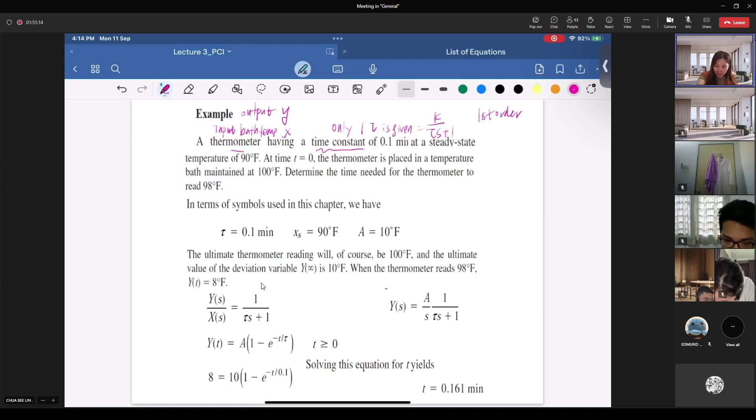So thermometer, they should tell you the output, let's say, is Y. Bath temperature, let's say it is X. So this is your input. So when you have Laplace transform, you will get YS over XS when you Laplace transform. So this Y stands for the thermometer reading, and this is the bath reading, the change. You imagine you have the water bath initially steady state at a value of 90.

So you have two water baths. This water bath, your X steady state is 90 degree, or you put the X as equals to 90 degree Fahrenheit. The water bath temperature initially steady state at the value of 90 degree Fahrenheit. So imagine if this thermometer comes into equilibrium with this water bath, the initial value for your Y during steady state should be exactly the same value like the water bath. So your water bath temperature, 90 degree F, also will be the steady state value of your thermometer at T equals to 0. So your thermometer should also give you during steady state, Y bar or Y0. The other is X0 at time equals to 0, steady state. It will be exactly the same as 90 degree Fahrenheit.

So when everything achieves steady state, now a change is applied at time equals to 0. You place this thermometer into the second water bath, where the water bath temperature already achieved 100 degree Fahrenheit. So the change, now you remember transfer function, you actually use deviation variable, meaning it already represents the change. So in this case, your X changes from 90 to 100. So if you change to Laplace transform, it is actually M over the S, it is 10 over the S. From 90 to 100 for your input water bath. From 90 change to 100, so it's a magnitude of 10.

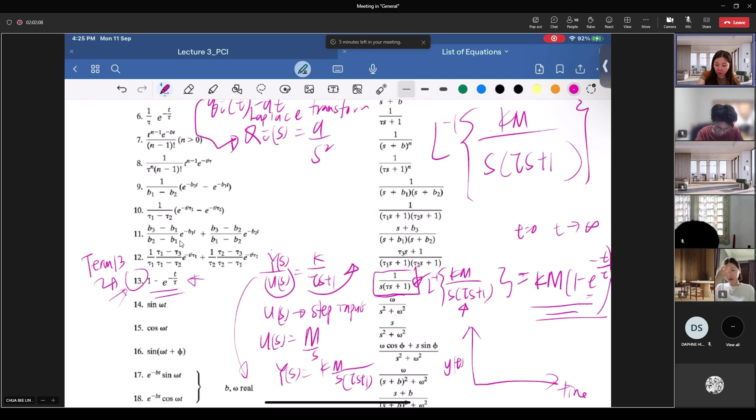You can refer to the list of equations, Laplace transform. So you refer to tau s plus 1, term 6.

So you copy this, this will be your answer: 1 over tau, e to the power negative t over tau.

So you don't follow the solution shown on the slide, but you refer to the term we have, which is term number 6. So I put here, this can be solved using term number 6. Straight away you can use 1 over tau, e negative t over tau.

Right, so this is your Y(t) solution.

This is exactly when you multiply your tau to the other side, you will get tau Y(t) equivalent to e negative t over tau, exactly the same answer as this one because they multiply the tau to the other side.

But we don't follow this, we use term 6, which is this one. So this is the impulse.

Ramp input, we have done this previously. So let's say you have your Y(s) over U(s), the change of your input is a ramp input.

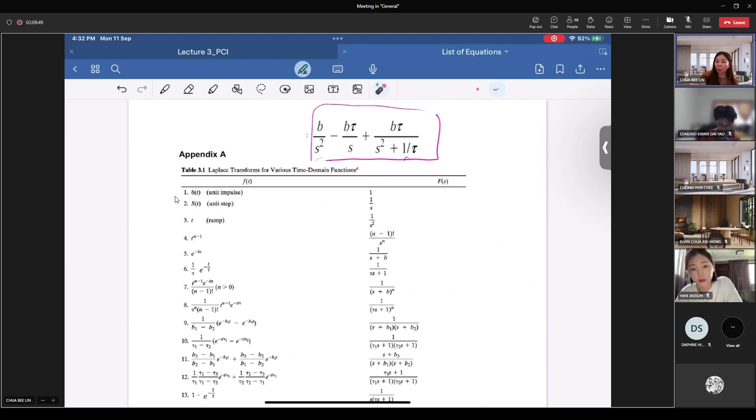Finally, for your inverse Laplace, you will get the tau. Then this one, if you do not divide by tau, you will get just like the direct conversion. Solve using partial fraction, you can solve until the end to get the answer exactly based on this Laplace transform table to get the final answer of all this.

And of course, this one you have to refer back. This is B tau. This one is term 13, I'm not mistaken. So factorize and so on, try to get this exactly the same answer. But I give you some rough idea—it is solved using the partial fraction.

So this example, you have to solve using partial fraction, and the change is a ramp input. So when the question involves the input type—the type of change they are applying to the input is a ramp input—then you cannot run away from solving the final answer using partial fraction. If the change is just a step input, then it is very simple.

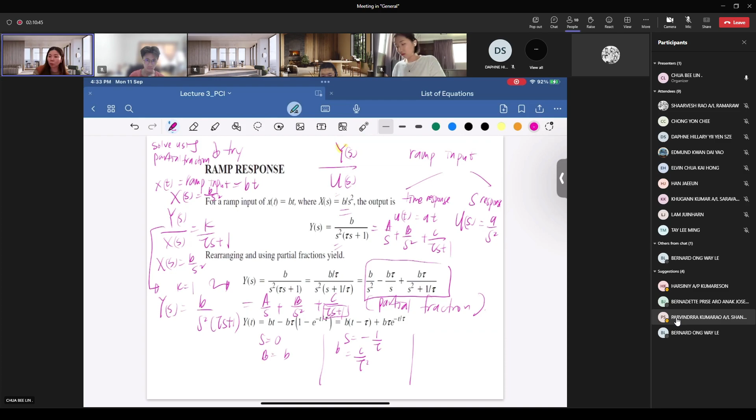It's term 13, if I'm not mistaken. So if it is term 13, yes. If M equals to magnitude of M, so when you change the U of S, it will be M over S. If the change is a step input, the answer will give you term 13. If the change is a ramp for your U of S, you will get the answer of B over S squared, for example, or A over S squared, where the change is AT, BT, or AT. In this list they use A, but in the question they use B.

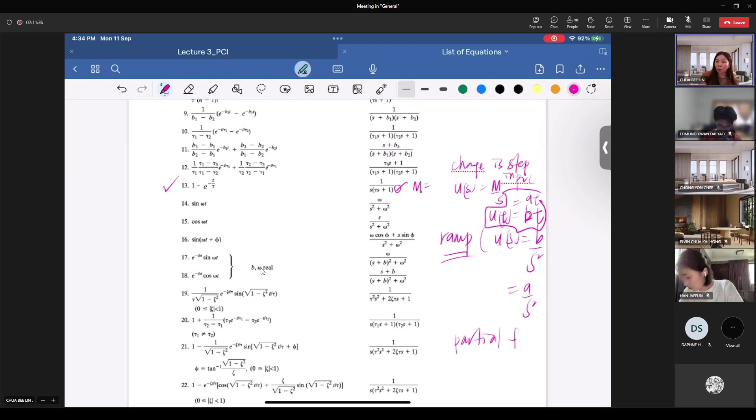So if the ramp input is applied to your input, then you have to solve further using partial fraction. The example is given in the lecture slide, and this is for your homework. We have learned this already, and we have solved this similar question using the integration method in Lecture 1, I think so. Now the same question, but you solve using the transfer function method.

So meaning that for simplicity, we make the following assumption: density and volume constant. When volume is constant, as you have derived previously, you identify all the mass rate going in equals to the mass rate going out. For example, W1 plus W2 equals to W. You can derive again, like dm over dt equivalent to W1 plus W2 minus W.

Rho V dt. When you expand the m equals to rho, then you will be having dv over dt. So when v is constant, you'll be having this one equivalent to 0. When this is 0, then you will be having W1 plus W2 minus W.

You can use this during unsteady state and also steady state. So this is one. Second, W1, W2, and W are constant. Before the change and after the change, they are constant at the same value. So what is the one that changes? The one that changes is x1, meaning your input. You have two inputs, input 1 and input 2.

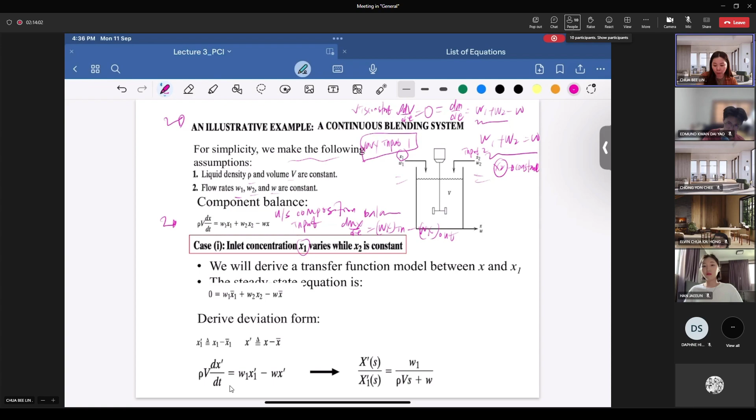This is an unsteady state composition balance, where we use the equation dmx over dt equals to wx of in minus the wx of out. Then you expand the equation m equals to rho v, so dm over dt becomes rho dv over dt, because m equals to rho v. That's why you have this.

When you have x here, it means x is inside, but since v is constant, you can avoid the chain rule. You can have rho v dx over dt. We also demonstrated that when v is not constant, you have to solve using the chain rule or product rule, like in lecture 1. So in this case, v is constant.

Simplify the whole thing to be w1 x1 plus w2 x2 minus wx. Since x1 varies and x2 is constant, you have to put the s here because x2 is constant, or in this case, you should actually put a bar on top.

So you derive the same way, using the unsteady state equation minus the steady state equation. You should be able to derive, in this case, the deviation variable x prime, which is actually x minus x at steady state. Then the same goes for your x1 prime, which is x1 during unsteady state minus x1 during steady state. So it's S.

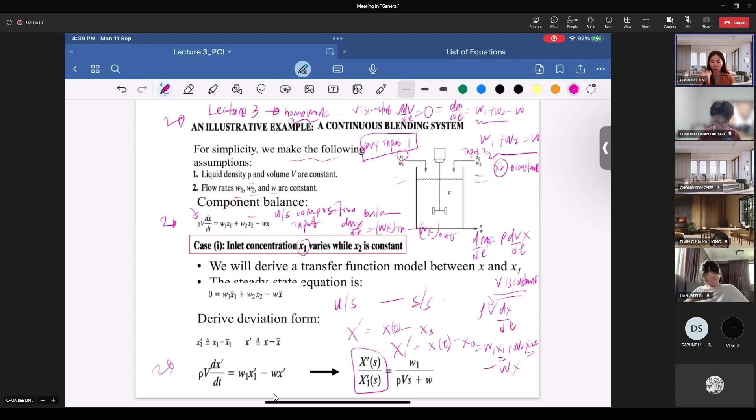Same goes for the second scenario, when both x1 and x2 vary. When you have x1 and x2 vary, you will be getting two transfer function equations. x1 and x2 varying means you have two inputs, and when you have two inputs, you have two transfer functions. Based on this example, your output is x.

So you'll be having the transfer function of x over x1, function of s, and output x over x2, function of s. You do not derive it twice, it is just one single equation. You split it into two parts.

So I'll be having output x prime over x2 prime equals to B. Same equation split into two, output over input 1, output over input 2. Then you will get this answer.